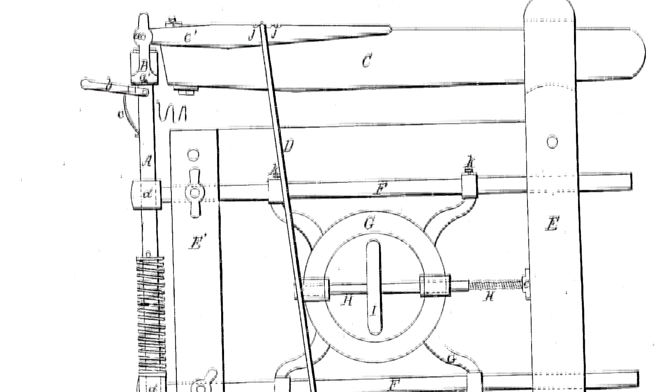I know he was involved in the Fay machine, and I know that he built furniture. I got the impression that, like many people of his time, he was an entrepreneur who would invest in other people's ventures, as well as his own. I think probably Mr. Jocelyn saw something of himself as a younger man in his grandson, both being interested in manufacturing and production and using ingenious methods to create new products to sell.

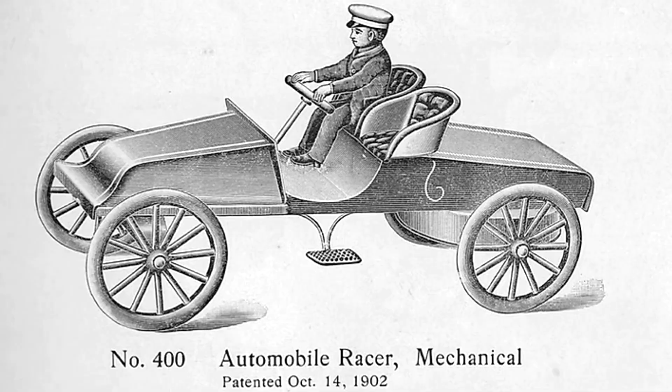Under H.T. Kingsbury, Wilkins Toy Company became very well known for, among other things, its cast iron model transportation toys. In the early 20th century, Wilkins became the largest producer of toy automobiles in the country.

Edward Jocelyn Kingsbury, the eldest son of H.T. and his wife Lottie Friend, and a member of the MIT class of 1915, joined the company after college. While at MIT, Edward's senior thesis, design of an automatic chucking, drilling, and ferruling machine, was inspired by the making of wooden handles for garden tools. It was clear that for him, innovation was job one.

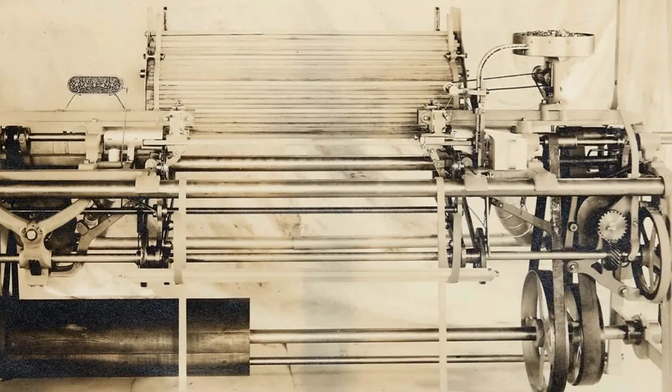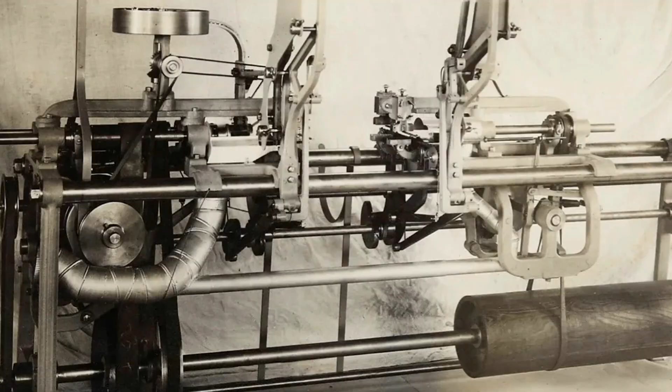Edward soon learned of a challenge with producing wheeled cast iron toys, and expanding on his collegiate drilling experience, created a 2-spindle horizontal drilling machine with a weight feed.

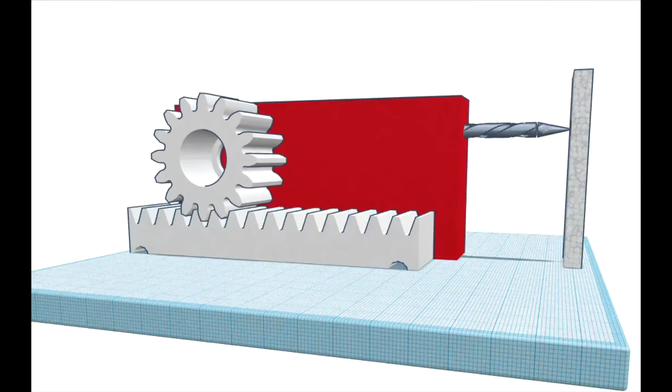That automatic drilling machine became a reality that helped drill holes in the wheels of the toys that were made out of cast iron, and the drill bits kept breaking off. This automatic drilling machine was pressure sensitive, so the drills could go in and out and not break off to drill the holes for the axle in the toys.

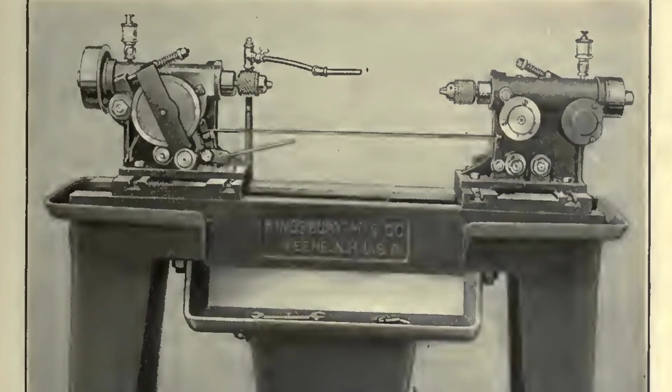With that technology, they expanded their capabilities and offered a sensitive feed drill unit and became known as a manufacturer. The friction drive drilling machine performed the task so well that within months of its introduction, Kingsbury was contracted by the U.S. government to drill and tap a special wingnut for the country's fledgling Air Corps.

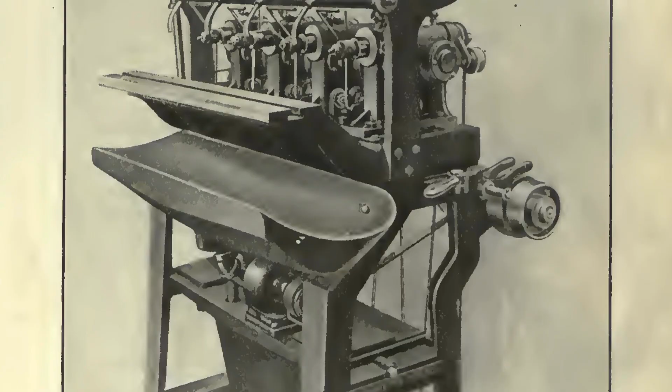My wife's grandfather was there, and he was actually working, supporting the war effort when Kingsbury participated in supplying equipment to the military.

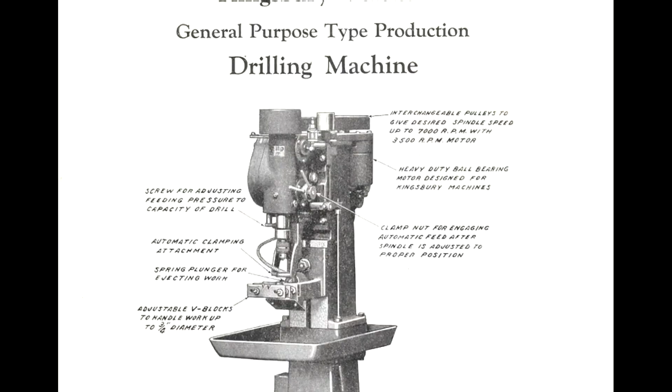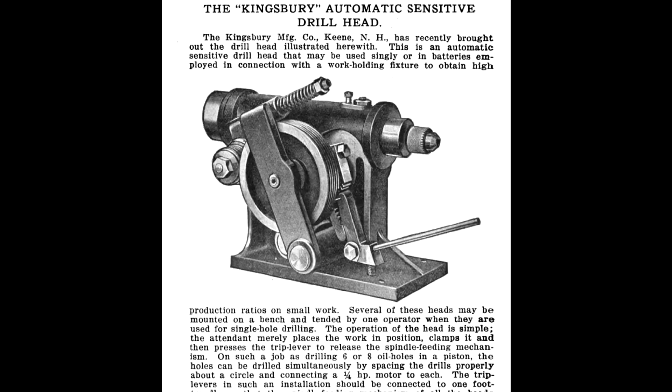The original machine used to produce the wingnut is now a part of the Smithsonian Institution's display of historic machines. Believing that other manufacturers would find uses for the machine, the company, now known as Kingsbury Manufacturing, put it on the market. Some were sold, but more importantly, manufacturers started asking for machines to solve other drilling problems, and the Machine Tool Company was born.

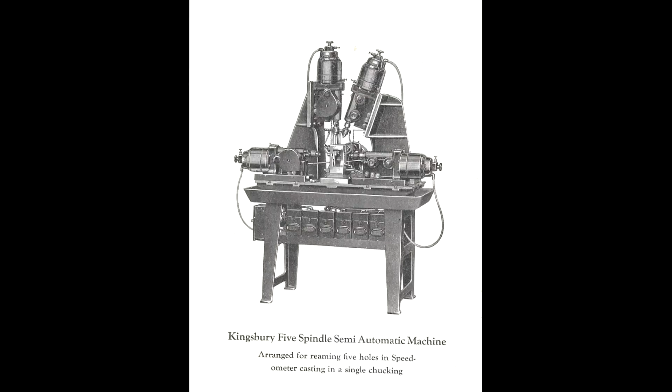Edward began redesigning his machines to increase productivity and efficiency. He created new ways to adjust the variable feed pressure and added attachments to allow the machines to multitask.

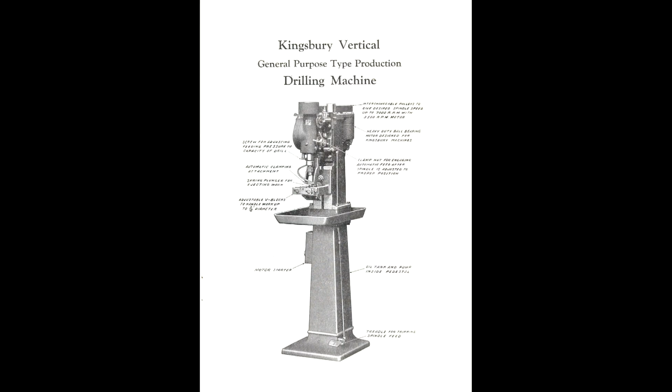So the progression of the Kingsbury Machine Tool Company, their offering started back again shortly after the war effort. They would come out with a small single-purpose stand that maybe would drill or maybe drill and tap a component.

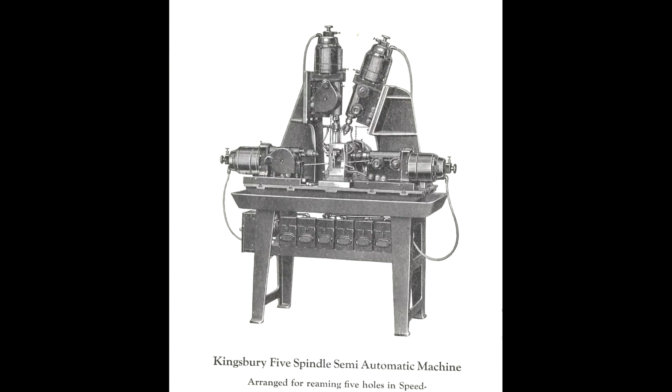And over time, the need for more volumes, more operations, forced the company to improve their offering with adding an index table which allowed multiple operations to be performed on a customer's component so that it would all be completed when the workpiece came off the unload station.

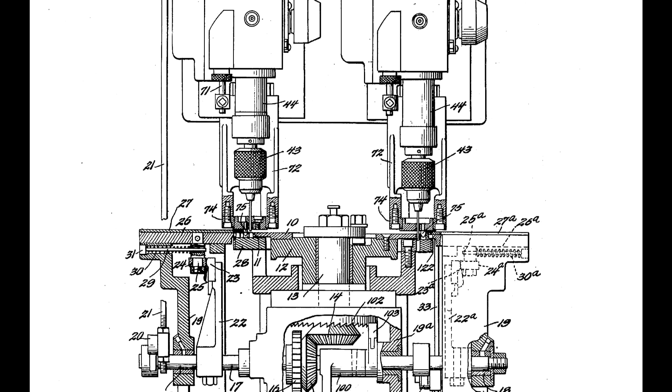While HT and his other son Chester managed the toy company, Edward focused on research and development of machine tools. In 1921, with demand for custom drilling machines increasing, Edward enlisted the help of Gunnar Swanberg, an engineer out of Detroit. By 1926, the machine tool business had become so good that it required a separate building.

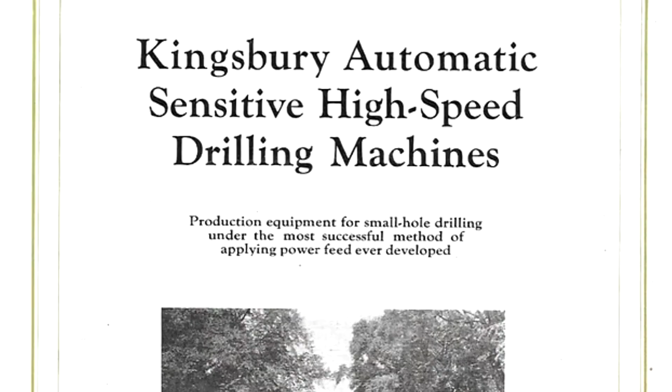And in 1928, Kingsbury Manufacturing became two separate companies, Kingsbury Manufacturing, which produced the toys, and Kingsbury Machine Tool. Kingsbury Machine Tool was built around one operation, drilling a hole.

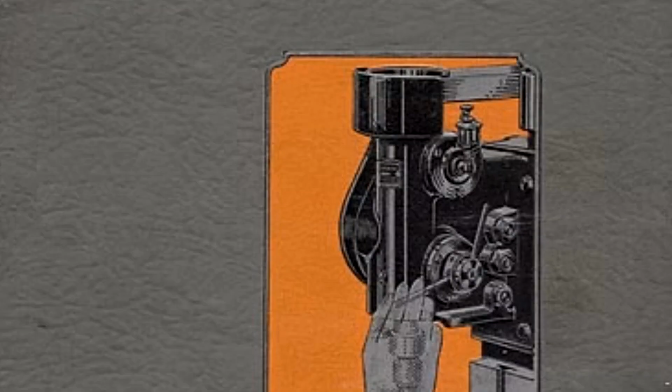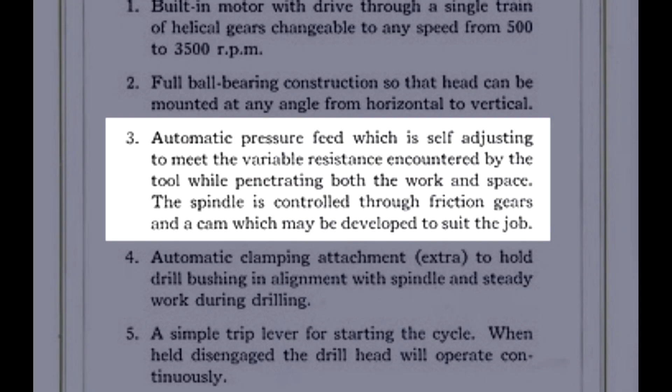But not just drilling a hole, drilling a better hole. Edward's first breakthrough involved reducing pressure at the point of attack, allowing drills to advance slowly through hard spots in cast iron, preventing costly bit breakage and production stoppages.

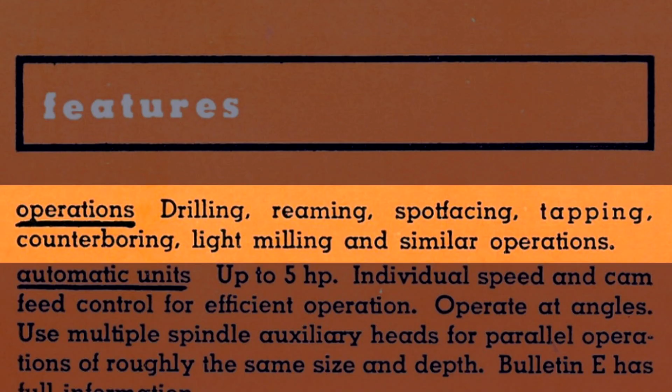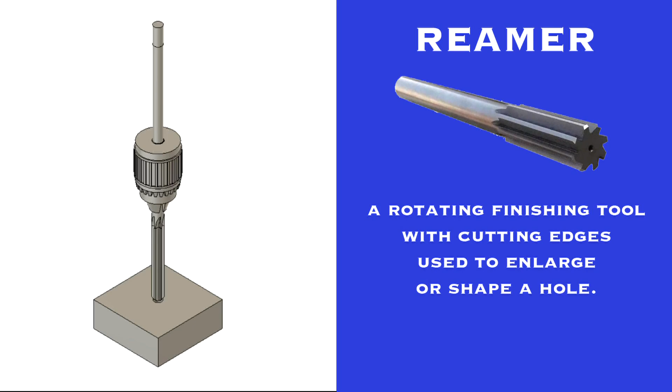Edward expanded upon basic drilling to design specialized drill heads for taps, reamers, counterborers, and numerous variations. Twist bits could have pointed or flat bottom ends, depending on whether complete penetration was desired. Taps created threads for bolt mating, with multiple types based on hole specifications. Counterbore bits created indentations for various bolt head types - V-shaped, round with hex depressions, hexagonal - ensuring bolt heads sat flush with material surfaces. Reamers smoothed holes to exact specifications, while smoothing bits prepared surfaces for bolt placement.

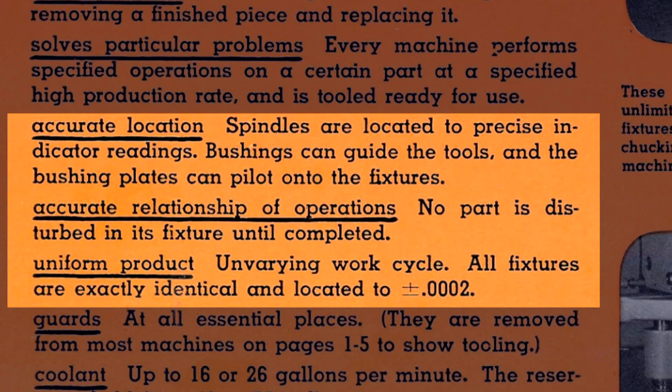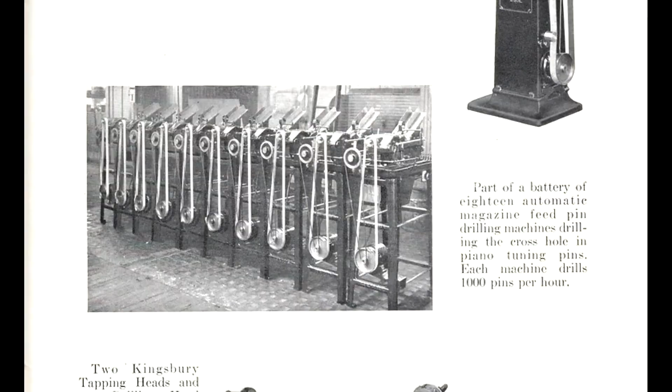Kingsbury tools prevented breakage while achieving extreme accuracy, essential for producing hundreds of identical, interchangeable parts daily with thousandth of an inch precision. Machines handled holes ranging from hair-thin to large diameters at rates of 1 to 3 parts per minute. Parts feeding evolved from manual placement to automated feeders, reducing human involvement to simply loading the feeder mechanism.

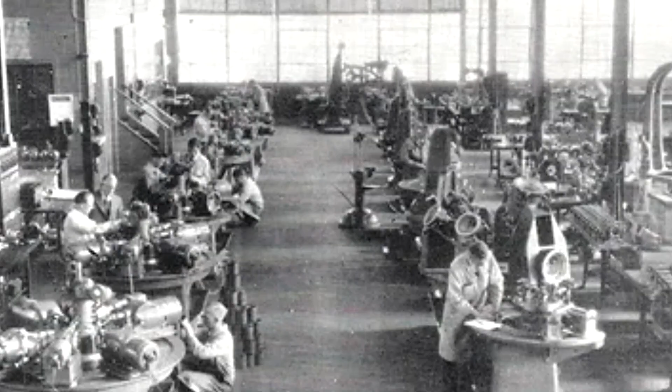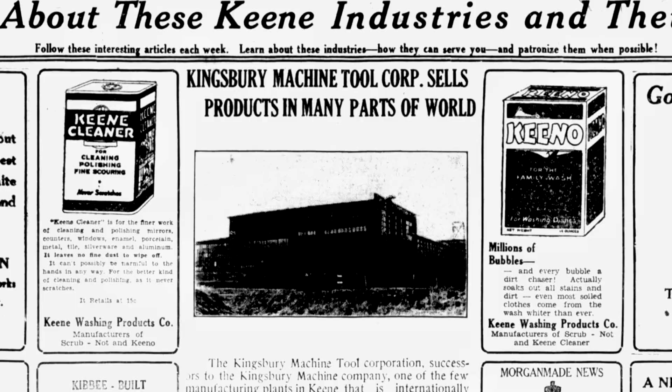Business continued to flourish, and a 2-story addition needed to be added to the plant for a larger tool and engineering department. By 1928, the company's daily output was equal to the total production of the first year in 1921. Customers included Singer Manufacturing, National Cash Register, and Dodge Brothers. Machines were being sent around the country and as far away as Europe, Japan, and Australia.

From the beginning, the Kingsbury family put an emphasis on treating their workers fairly and with respect. As profits grew through the 1920s, so too did the staff, and they were sometimes called upon to work night shifts or work overtime multiple times a week.

To stimulate goodwill and a positive attitude, Kingsbury's formed a club promoting the athletic and social welfare among the employees. Meetings were held twice a month with a dinner served, along with speakers, motion pictures, or local entertainers. And teams were put together to compete in athletic leagues in and around Keene.

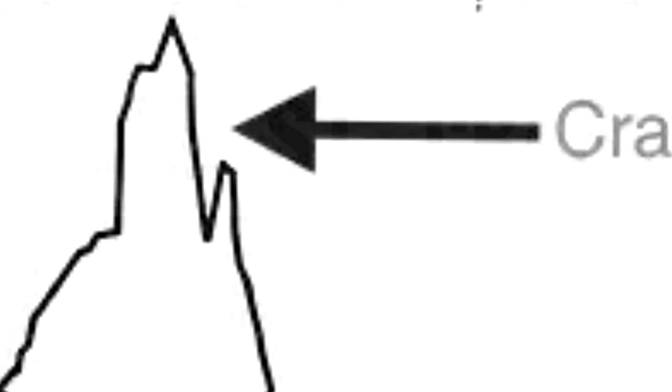A few years later, the country was ravaged by the Great Depression. The stock market crashed on October 29, 1929, and continued on its downward path until 1933. In 3 years, industrial profits dropped by nearly 80%, and manufacturing employment dropped by 1/3.

The economic challenges had not immediately affected Kingsbury Machine Tool, but by 1931, a sudden drop-off in business resulted in an annual loss. The automobile industry was a burgeoning field for the company, but also one of the industries most affected by the economic downturn. At Kingsbury, layoffs came about in 1932 along with a reduced work schedule for remaining staff, and management reportedly took little to no salary during the Depression.

Lottie, who had her own resources, was able to bankroll the company to make up for what it couldn't sell in toys. They would say, 'How much do you need?' And someone would say, 'Well, I can get by on a couple dollars.' Okay, they'd pay him a couple dollars and move on to the next person.

In 1933, Franklin Delano Roosevelt became the president and put his focus on regrowing the economy through his New Deal policies. While not all of his new policies worked, enough did to get the nation's fortunes turned in the right direction.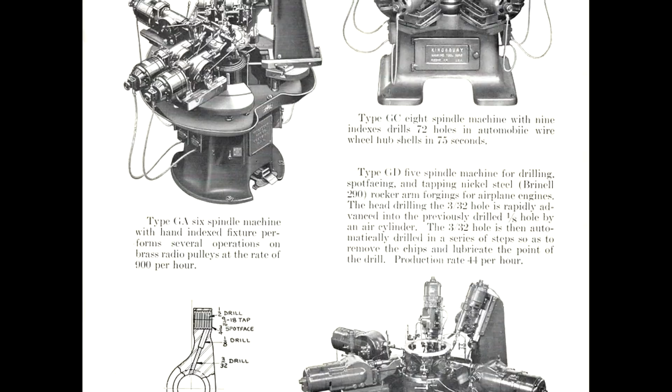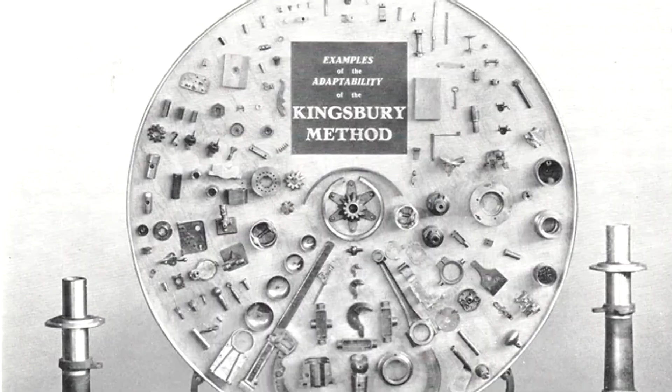This was true at Kingsbury as well, as customers' needs began to expand. Heavier machines were built. Engineering problems arose and were solved. Kingsbury developed its own solenoid for tripping units electrically instead of by hand or compressed air. Longer strokes, automatic lubrication, overload protection, and provision for changing from drilling to tapping were called forth depending on manufacturers' needs.

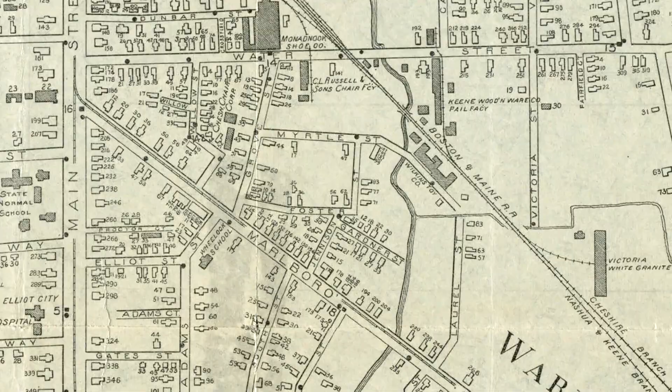The Kingsbury plant's proximity to the Cheshire portion of the Boston and Maine Railroad served as an important cog in the transportation of the company's machines. But in the 1930s, the plant's proximity to Beaver Brook would provide some serious challenges.

In March of 1936, several inches of rain fell in a short period and also melted several inches of snow that was on the ground, resulting in devastating floods across the region. The flood caused millions of dollars in damage, much of it in the form of destroyed bridges, including several that connected Cheshire County with Vermont across the Connecticut River. All of the brooks and rivers in downtown Keene overflowed their banks.

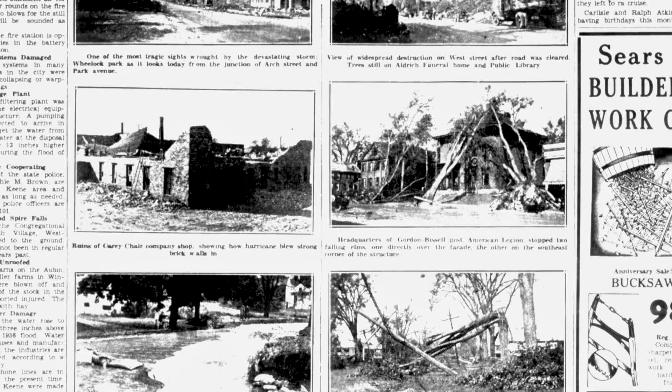2 years later, the Great Hurricane of 1938 hit Keene. As the Sentinel reported: 'Scores of automobiles were crushed in the streets by falling trees. Many houses are wrecked. Hundreds of the city's beautiful elms lie toppled in the streets. All industry is crippled. Factory roofs torn off and water running through plants. The first church spire was blown down.' Kingsbury did not escape the wrath of the storm, but the damage was repaired as quickly as possible,

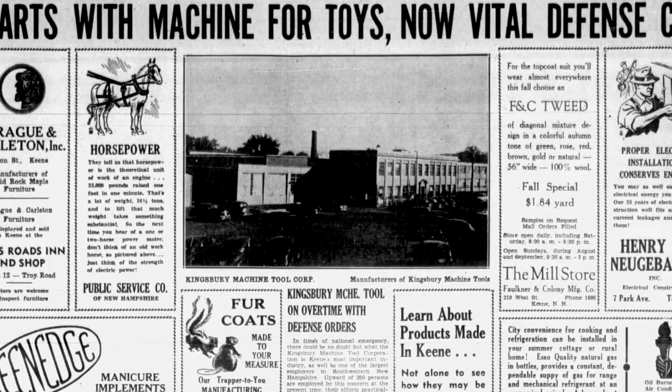and the plant was up and running just in time for the next big thing, World War II. Kingsbury had had the government as a client since the early days of the drilling machines, but that interaction went into overdrive with the onset of the Second World War.

With so many resources going to the war effort, the toy factory was forced to shut down. During World War II, the price of steel had gone up, and after the war, the government froze the price of consumer goods like the toys. So we couldn't raise the price of the toys, and it was no longer profitable to manufacture them.

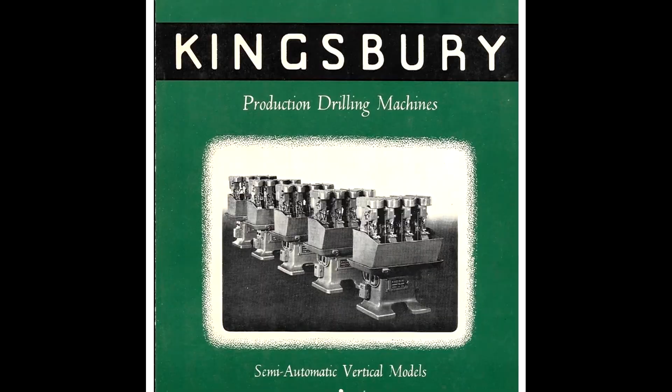So they converted the entire factory to just the machine tools. The last toy was made in 1945. But the Machine Tool Company took off. To support the war effort, Kingsbury was producing machines for fuses, aircraft engine parts, rifle bolts, and other gun components. A battery of machines was designed to make M1 rifle parts.

After the war was over, a new member of the family joined the business, Edward's nephew by marriage, Charlie Hanrahan. He was over there as an aircraft mechanic during World War II. When he came back, he worked at GE - I'm not sure what he did there, but he was mainly manufacturing.

He knew how to make the parts, and he was very comfortable with the people on the floor. He used to walk through the whole shop, and anytime there was a new employee, he would want to get to know them. So he would come over and say, 'Hey Ken, who's that new fellow?' So I would tell him. Maybe the following week he'd ask the same question until he really got to know him. Charlie, by the second day you worked there, he knew your wife's name, your kids' names, your parents' names. It's just the way he was.

He used to say that before he'd go down on the floor, he had the secretary make him up a list of all pictures. He'd have pictures of everybody, and he'd go through and look at all the names and do it with the pictures each time he went down to the department, trying to memorize the names as best he could. Then he'd go down and call these people by their first names because he had just studied the photograph. He got the reputation of knowing everybody's name, but he had to work at that.

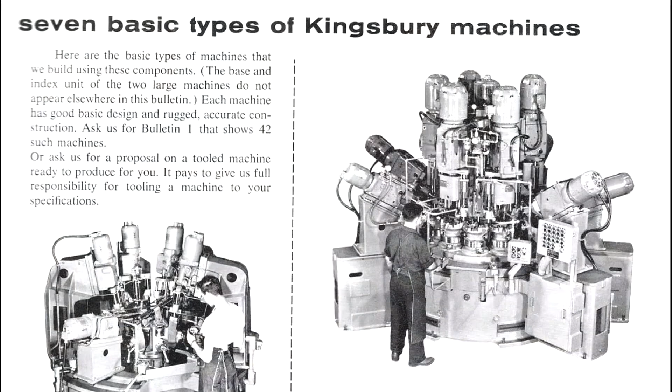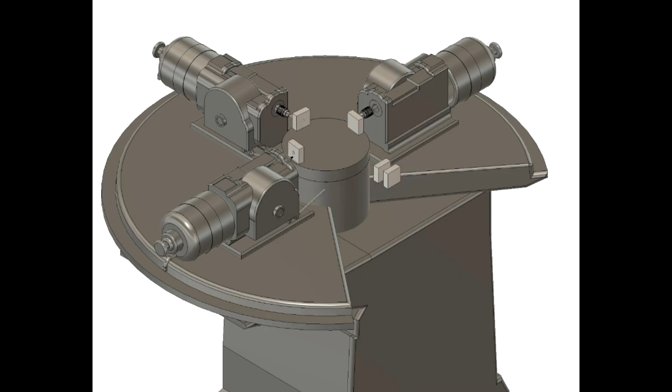Kingsbury developed multi-head machines for simultaneous multiple operations or sequential processing. Until the 1960s, they built rotary machines while continuing production even after introducing inline machines. Rotary machines used carriages rotating around circular tracks, stopping at stations for operations. Carriages could rotate or tilt to present different faces to horizontally, vertically, or angle-mounted heads, with 8 stops, 8 parts processed simultaneously throughout the machine.

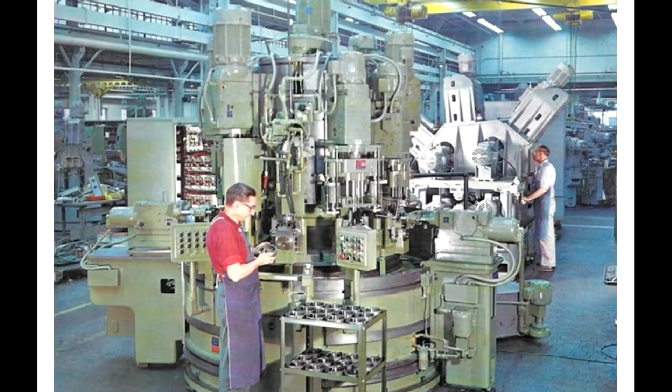You could put up to, I think it was 14 fixtures on a big 207 rotary machine. So what you'd do is take the rough casting, put it on a fixture body, and it moves to station 1, rotates 1 station, 1 index. Maybe that index has a milling operation. Then it will index to a second, third, fourth, and it goes all around. Once you get the machine filled up with 14 units, you go ahead and put a part in, and when the 14th unit indexes, you get a part completely manufactured.

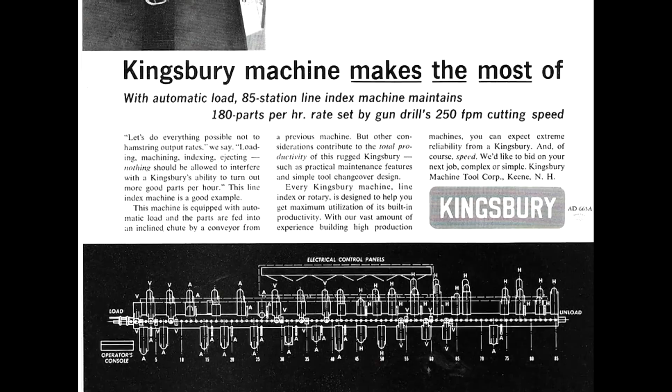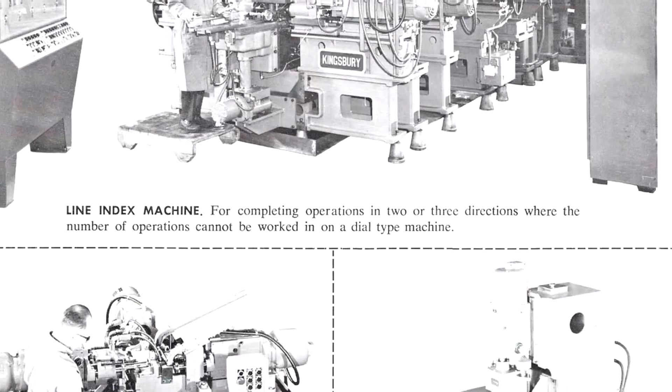Early machines operated independently with manual part transfers, but inline machines eventually linked together, allowing infinite stations compared to rotary limitations. All Kingsbury machines were custom built for specific parts, involving custom carriage track design, feeding mechanisms, and head placement. However, Kingsbury maintained inventories of standard bases and operational heads, typically combining existing components.

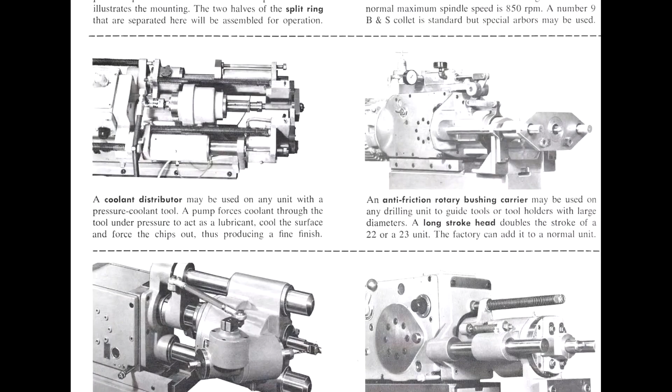They would come down, and then the spindle would feed out on an angle to put a hole on a certain angle into the part. The heads themselves were standard, but all of the fine tuning was individual to each machine and to each station.

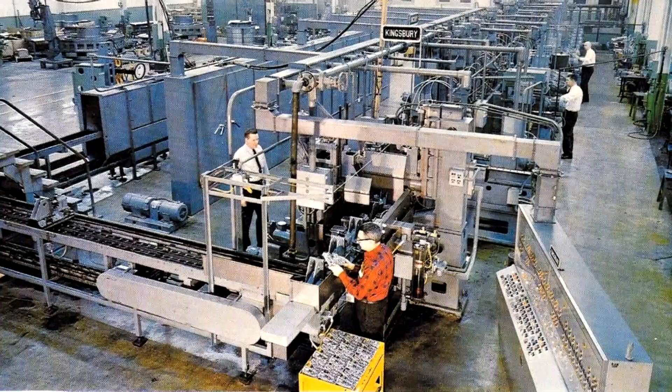When jobs exceeded standard capability, truly custom machines were built, adding new bases or heads to inventory. Inline machines shared common bases and heads between sections with established carriage movement methodology requiring only part-specific adjustments.

As the 1960s began, Kingsbury was about to undergo a major management change. Edward Kingsbury had turned over his presidential position to Gunnar Swanberg in 1955, but Kingsbury Machine was still a family business, and Edward continued as board chair.

All 3 of HT's children worked for the company at some point. Edward's brother Chester worked with HT at the toy company, eventually becoming president, and moved over to the Machine Tool Company after the war, although this role was gradually decreased due to depression caused by losing his son Beanie in that war. That would greatly change my grandparents.

Edward's sister Lucy and her husband Allison Piper worked at Kingsbury, as did their son David. Their daughter Peggy was married to Charlie Hanrahan, and their son Mike would spend much of his career on Laurel Street. Edward's son Ted rose to second in command, and his son-in-law Henry, Hank Frechette, would also join the Kingsbury ranks.

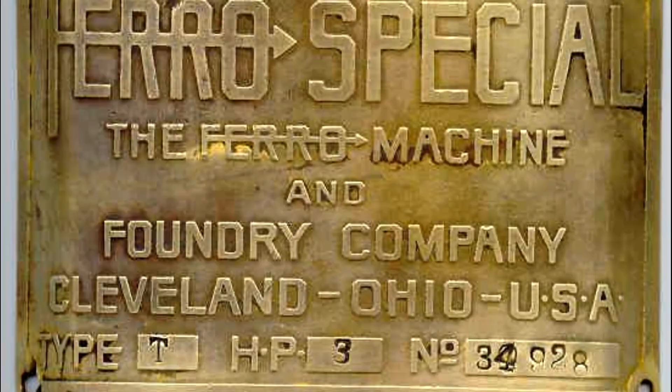Hank had married Sally Kingsbury just prior to shipping out for a naval stint in World War II. He had cut his teeth in the business at Ferro Machine and Foundry in Cleveland before replacing Chester as president of Kingsbury's subsidiary, Fitchburg Foundry, in 1948.

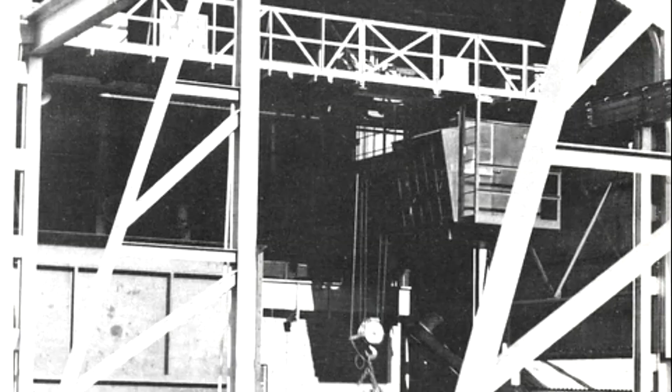The foundry had been purchased because Kingsbury's was having trouble acquiring much-needed castings after the war. Six years later, Hank moved his family back to Keene and began working at the home office. In 1962, Swanberg was elevated to chairman of the board, and Hank was named president.

Then EJ had a very difficult decision, and EJ picked Hank Frechette, not a machine tool guy, not an engineer, not somebody who goes down on the floor and knows how those machines are running, or has in his basement, like Charlie Hanrahan did, and later Pete Warren, all kinds of fancy machines. EJ picked him to run the company, so that was clearly a very important decision in that company.

He was typical of the early culture. You felt it was a family company. He knew who you were.

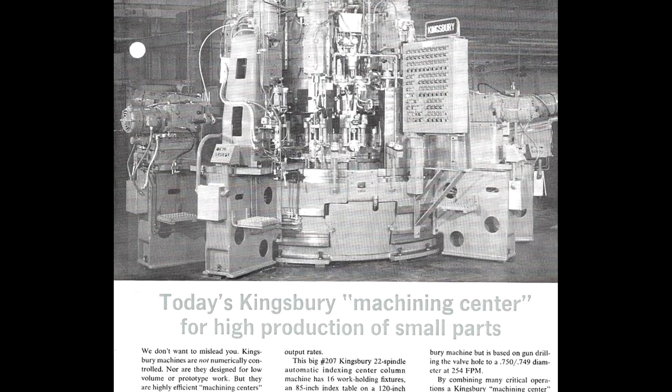From his new position, Frechette oversaw dramatic growth in the company. He traveled the world searching out new clients and developed partnerships with companies in Canada, England, and elsewhere in the United States. We had 23 manufacturer representatives throughout the United States and approximately 15 trading partners internationally that Kingsbury had established throughout its long history of machine tools.

The employee roster grew from 300 to 1,000, and it was well known that Kingsbury was a good place to work. People that were hired during the 60s felt Kingsbury was a womb-to-tomb company. Once you were employed there, you were going to retire there or they would carry you out, one or the other.

We were growing and we were buying a lot of capital equipment and we were hiring people, and profitability of the company was good, and the company was more than willing to share profits with employees through its profit sharing program.

Heard stories of people that had been there in the real big years where they'd get their check, they'd walk over to the Bailey Ford garage in the parking lot, buy a car, get change back from their check and go home.

And during years that we actually had no profit, we actually had some years of significant loss, they still gave us a small amount. And everybody said, well, that's not what we used to. They didn't have to give us that. They didn't have to give us any of the profit sharing in reality. It was considered the right thing to do during the times that they did that.

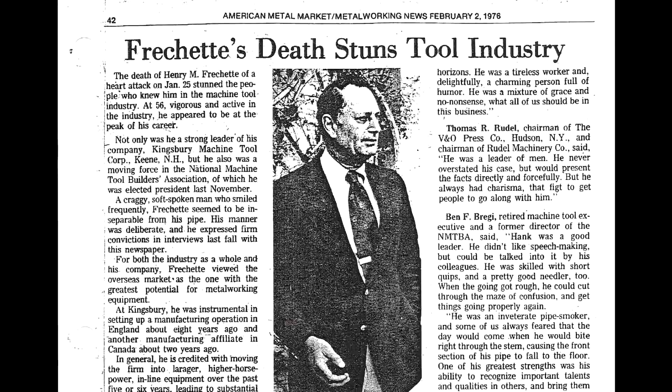Sally, or Priscilla, decided that she wanted the company to have ownership in Keene and to remain in Keene, instead of maybe selling to some conglomerate or somebody else in the machine tool industry.

Upon Frechette's death, Walter Burkhardt, who had been brought in to oversee manufacturing so Hank could focus on leading the business, took over the president's role for a couple of years before being replaced by Charlie Hanrahan. When you had Hank Frechette, you had Charlie Hanrahan, Walter Burkhardt - those were good years.

Walter Burkhardt was brought in from a competitor out in Michigan. He had been in the industry a very long time. He knew the business, he knew the product, he knew the customers. Those are golden years, and people were very loyal to the company, and the presidents expected that - to be loyal to the company.

After Charlie retired, things started to change. Not that it wasn't still a good company, but you could feel there was a difference. There were professional operators who had been with large companies in the Midwest - Walter Burkhardt, and then Jim Koontz came in.

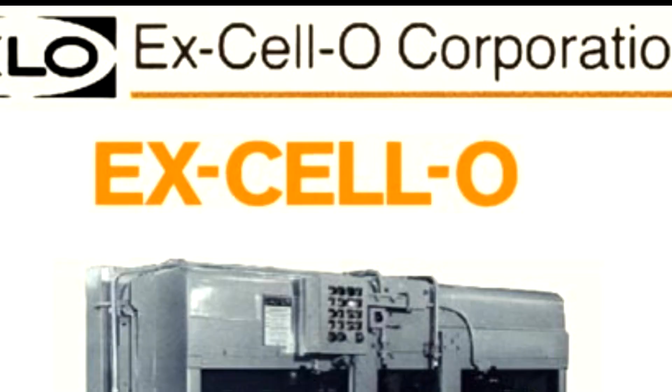And then he talked me into coming in, in 1978 - December of '78, I decided to come. So it changed from really being a family-run business to a business run by people who had been in the industry for quite some time.

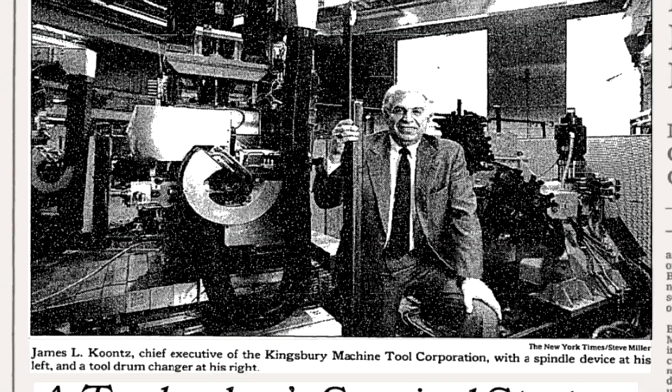Koontz was faced with a dramatic downturn in the machine tool industry nationwide, and a number of companies had to shut down. In an effort to keep Kingsbury profitable, as it had been every year since 1933, Koontz was forced to reduce the employees from 1,000 to 600 over 5 years.

Jim tried to bring the company into more modern times, which I think the machine tool industry was failing, worldwide. During the time that he kept Kingsbury going, more than half of our competitors went out of business. So the fact that we kept going at all was actually probably a big credit to him and what he was able to do.

If you look at the whole industry, there are no players left. I mean, Lamb is gone, Jones and Lamson's gone, Bryant's gone, everybody's gone. Jim made a valiant effort to change the company's direction - Kingsbury was becoming a dinosaur, and he tried to get the company into the later 20th century with a lot of computer-controlled equipment.

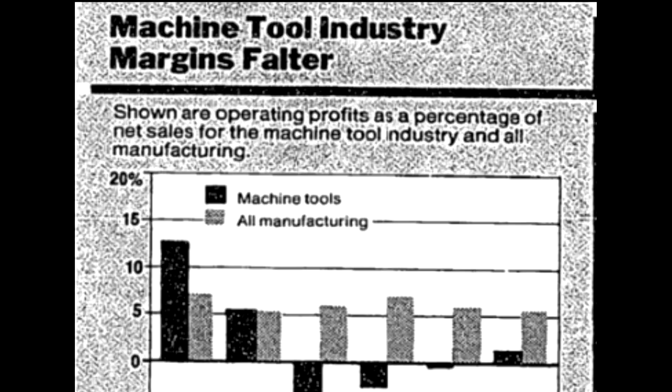So it was changing times that you had to get ready to change. And, I'm not sure we could have changed. There were many reasons for the dwindling profits, including foreign competition and customers' desire to refurbish old machines rather than buy new ones. Kingsbury was also a victim of its own success.

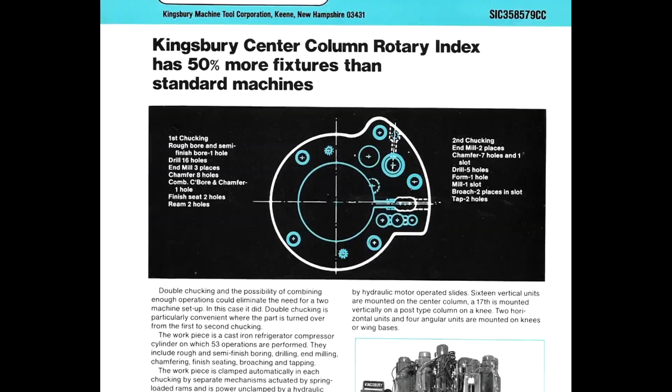By creating sophisticated machines that could replace processing lines that required multiple separate machines, they reduced overall tool demand. When I talked to people at Ford and General Motors and places when I went out there, they would say kind of the same thing.

They actually would say, 'you guys shot yourself in the foot.' Because if you had put a little less effort into this, it would have failed 5 years ago and we'd have had to buy another one from you. I heard that more than once - that the only problem with Kingsbury is they were too good.

Kingsbury's whole thing was, we are a high precision, engineered-to-order manufacturer of high volume capital equipment. The high volume went away, and the volumes became lower. The demand for the real special engineered, high production rotary index and transfer line products began to, in my mind, decline.

As the profits dried up, so too did some employee benefits. Profit sharing that had been a staple of Kingsbury employment dwindled to nothing because there were no profits to share, and eventually the floor workers voted to unionize.

The UAW had focused on Kingsbury over the years numerous times, and they made 3 more attacks in the mid-1990s. And on the 3rd try, after whittling down the membership group that they were going to try and solicit, they were successful in getting a union in.